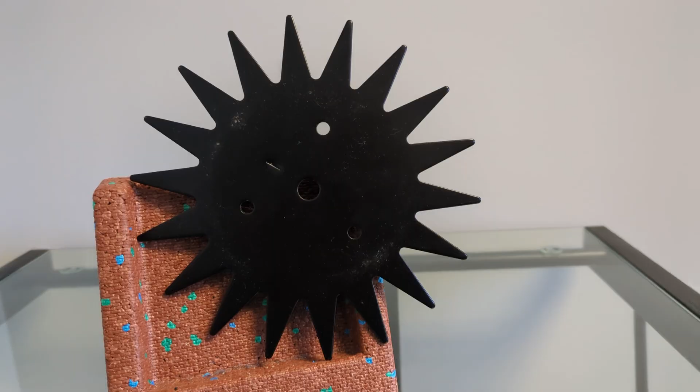In today's video, we'll continue our step-by-step guide, building an edger and learning the fundamentals of NX. This session focuses on designing the plastic hub. In addition to sketching and extruding, we'll be learning two new commands: pattern geometry and shell.

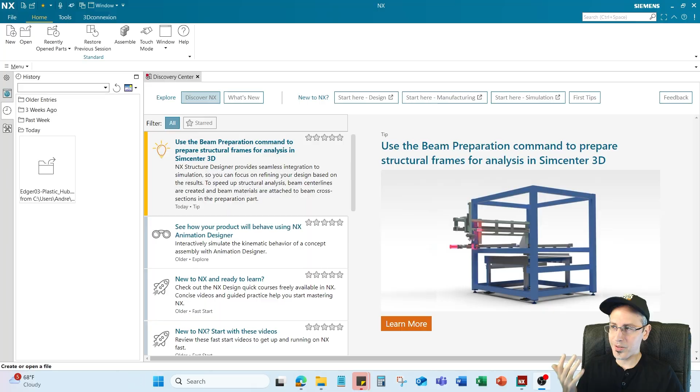Let's get started. As always, we are using NX 2406. Let's create a new file. Make sure your units are in millimeters, and then we are going to name this part edger.

03-plastic_hub. Select the directory you want to save into. I'm saving mine in a folder called edger 03 plastic hub. Press OK, press OK. We're going to begin by creating the main body of the plastic hub by sketching a

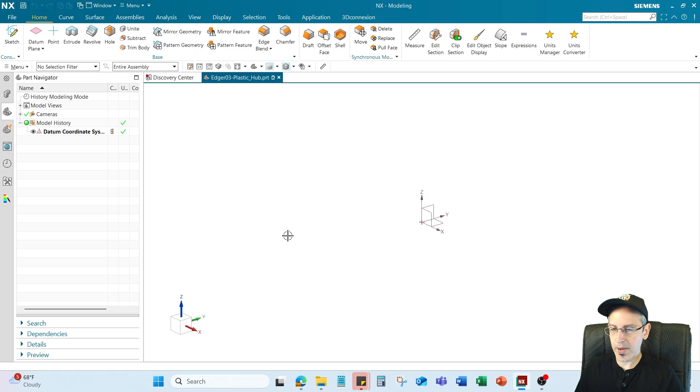circle on the XZ axis. Let's go over here, click on sketch. We're going to select the ZX plane, press OK. We're going to go and select the circle command, select the origin point, and we're going to create a nice

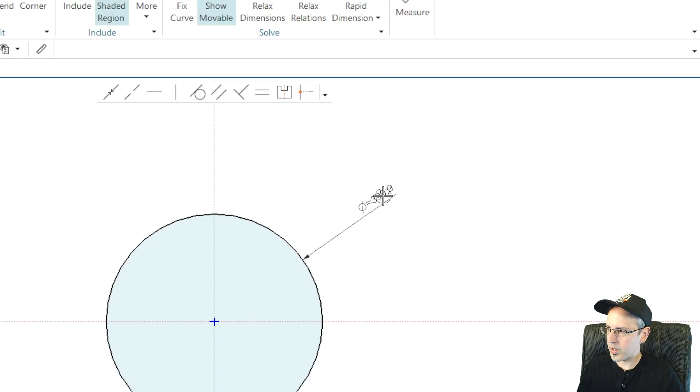big circle. Next up, we're going to click on rapid dimensions, and we're going to give this circle a diameter of 61 millimeters. Double click on the dimension, type in 61, and then if you'd like, you can click on fit. That way you're zoomed in a little bit closer.

After you're done creating the sketch, let's click on finish sketch. And now we're going to extrude. So let's go over here and click on extrude.

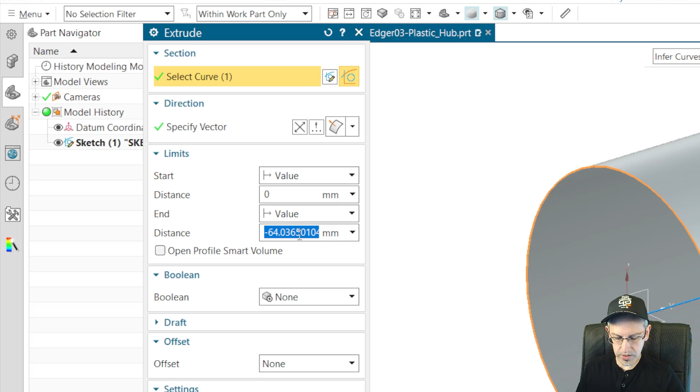Make sure your sketch is selected. We're going to input a start value of 0 and then an end value of 38. Make sure your Boolean operations are set to none, offsets none, and the body type is set to solid. Press OK. And there you have it.

Now we need to create the little grooves that go all around this plastic hub. Again, let's go ahead and click on sketch. Again, we're going to be selecting the XZ plane. Press OK. We're going to begin by creating these cutouts by sketching a rectangle first.

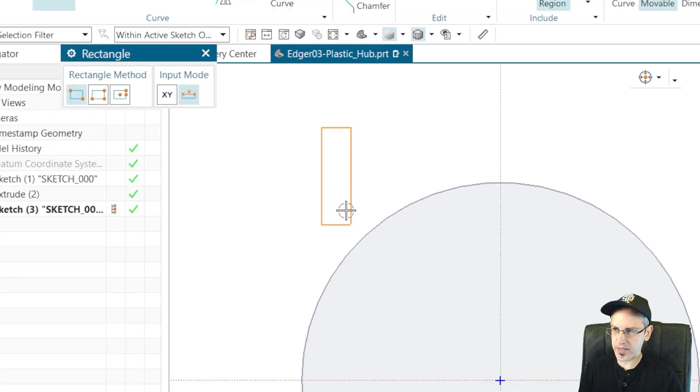I'm just going to put this rectangle out here in space. I'm then going to create a line command, and I'm going to select the midpoint of the top line and the midpoint of the bottom line. And then I'm going to right click on this vertical line that we just created and click on this button,

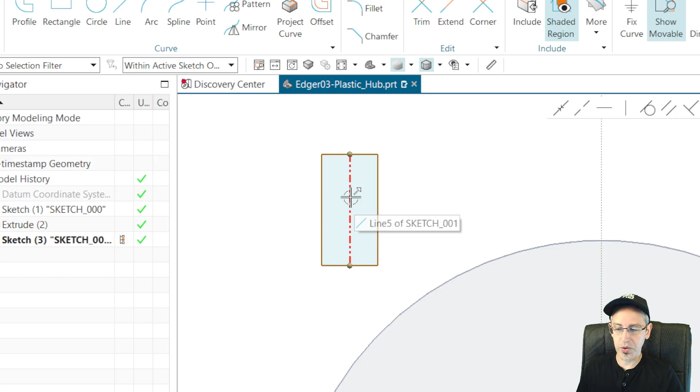convert to reference. What this does is convert the selected sketch curves or sketch dimensions to reference. In other words, when we extrude these lines, this reference line will not be extruded. It's just being used as a construction element to help us dimension the sketch to the axis.

So go ahead now and click on make collinear, and we're going to select this reference line and this vertical line right here of the axis system, and press OK. So now the reference line is collinear with this vertical Z-axis.

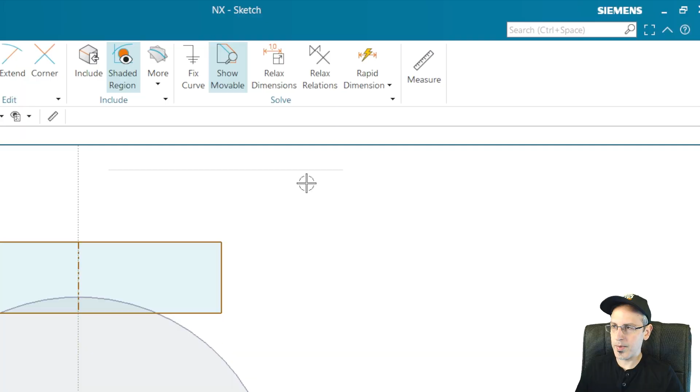Let's now put some dimensions on this box. Click on rapid dimensions. We'll put a rapid dimension on the horizontal and a rapid dimension on the vertical. For the vertical dimension, we're going to put a dimension of 15 millimeters. So double click on that dimension, type in 15.

We're going to double click on the dimension that says 44. We're going to reduce that heavily to 5 millimeters. Next up, we're going to put another dimension. So click on rapid dimensions again.

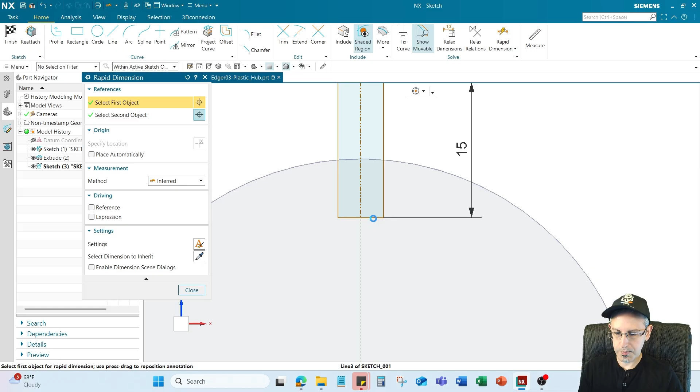We're going to select this bottom line and the origin point. For this dimension, we're going to make it 25. Pretty close, actually — it said 24. Just had to go 1 millimeter up. So now we've got the positioning of this cutout that we're going to create.

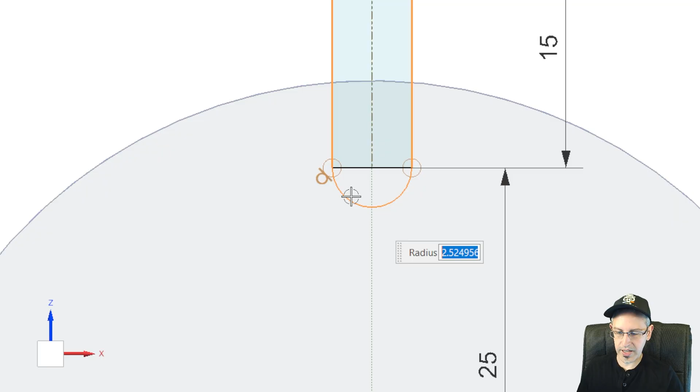Now we're going to add a curve to this rectangle. To do that, let's go and click on the arc command. We're going to select the corner and then this right corner, and we're going to create this arc, making sure it's tangent with both vertical lines. And we're going to put a constraint on this arc as well.

So click on rapid dimensions, select this curve. So we have our 5 millimeter diameter for our curve here, but we want to get rid of this line as well. So let's just click on that line and turn it into a reference line.

That way it doesn't get extruded by the command we're going to be doing. All right, that should do it for this sketch. When you're finished, click on the finish button up here.

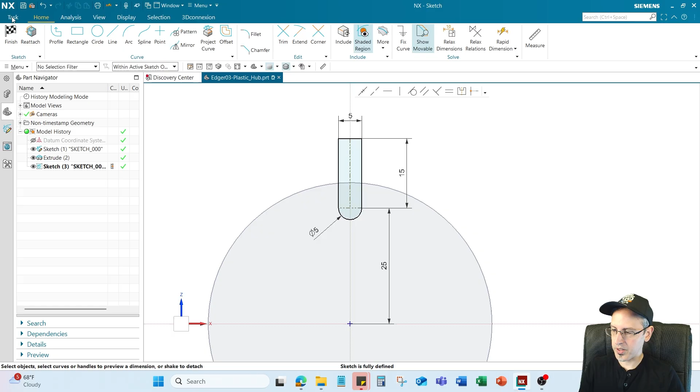We're now going to extrude this sketch that we just created. Go ahead and highlight the sketch, press extrude. Since this is going to be a subtraction, we're going to make sure this extrude goes all the way through, extended out far enough that it'll cut through the entire circle over here. Once you've done that, click OK.

We're now going to use a brand new command we haven't used yet, called pattern geometry. Go over here and click on pattern geometry. If it's not on your ribbon bar, go to the search engine, type in pattern geometry, and you'll find the command. What pattern geometry does is create several instances of a solid. It's like copy and paste on steroids.

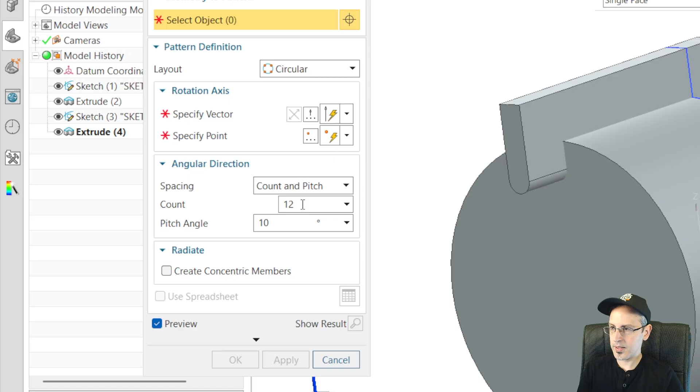Right now the default layout is linear. Click on the drop-down menu and click on circular. We're going to be doing a circular pattern. Make sure our count is at 6, and for the pitch angle, make that 60 degrees.

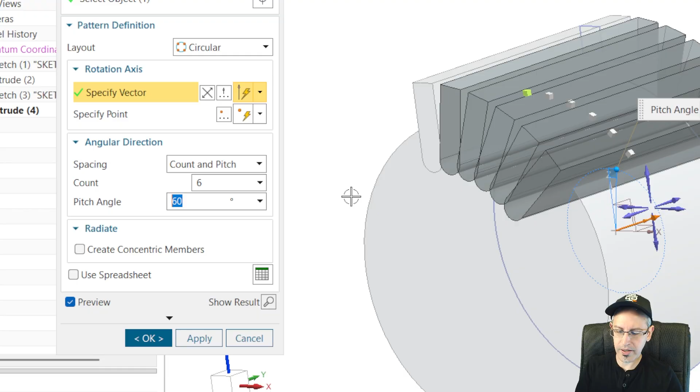We're now going to select the object we're going to be duplicating. Why remake the same object 6 times when you can just clone it like a sci-fi lab experiment? Once selected, click on vector, and we're going to rotate about the y-axis, so select the y-axis. Even though it visually doesn't display properly here, don't worry, it actually is. Just click on apply, and bada bing, bada boom - you got your nice instance geometry there.

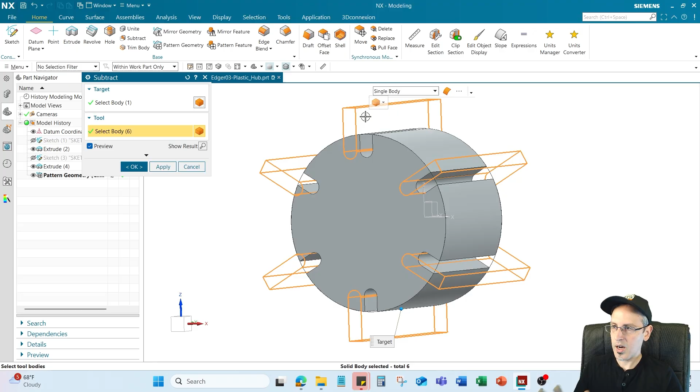Now that we have the pattern geometry, we can subtract all of this. Go ahead and click on subtract and select the target body, which is going to be the circle. The tool we're selecting to subtract is going to be the pattern geometry, but also make sure you select the original single body of the extrude we created with the sketch. Once you've selected all of those, press OK, and voila, you got your nice curves that you subtracted.

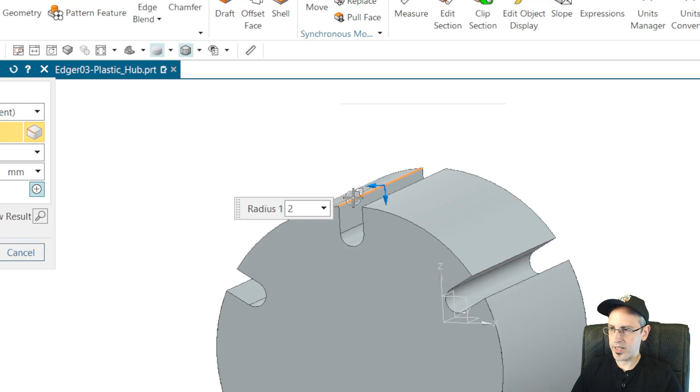Now we're going to start prettying this thing up by adding some blends. Blends are always a nice way to pretty things up. Let's go find our edge blend command. For the edge blend, we're going to set the radius at 2 millimeters, and select all the edges - all 12 of them. Press OK. Beautiful. Now we're almost done with this part.

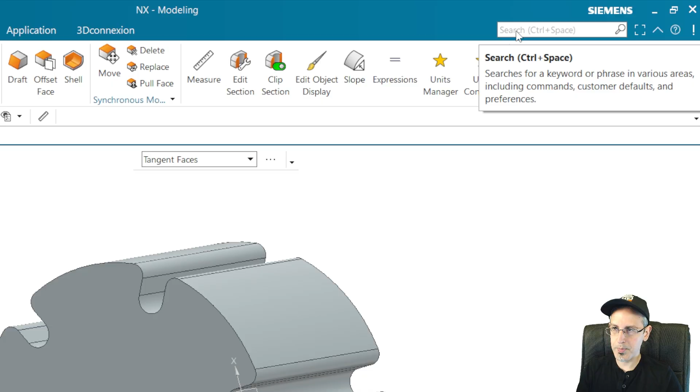Last thing we need to do is shell this sucker. The shell command is kind of like carving a pumpkin. Let's go find the shell command - we have it, right up top here. Again, if you can't find your commands, go to the top right corner and type in the command you're looking for. For the thickness, we're going to make that 1.5 millimeters.

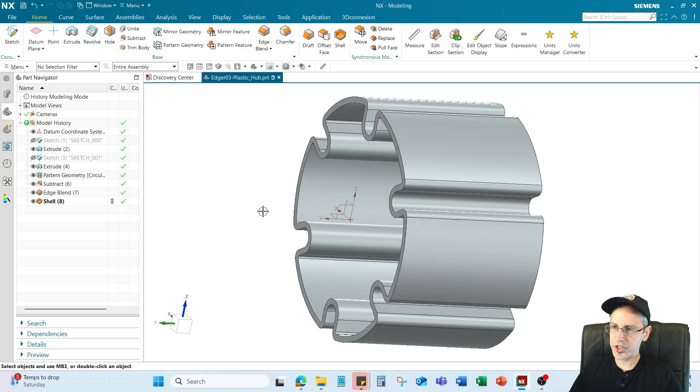Shell command is an awesome command. Give NX a solid block and it'll scoop out the inside, so you're left with a nice hollow model ready for action. Select this surface, and also rotate it and select the back as well. Press OK, and bada bing, bada boom, you got a nice hollowed out, shelled plastic hub. Pretty simple, pretty easy - didn't take too many commands.

Once you're done, make sure you click on save at the top left-hand corner. Don't want to lose any of that work we just did, and that'll complete the plastic hub.